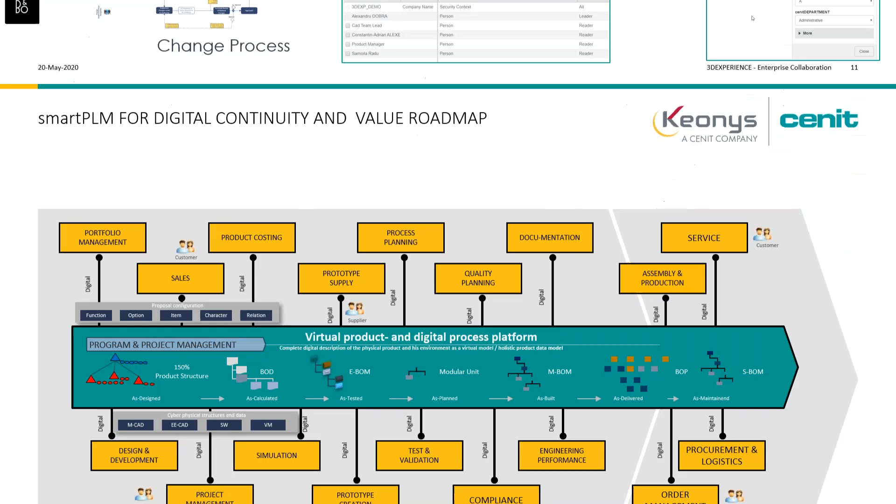Speaking about the digital continuity, we started in the earlier sessions with the platform foundation, managing documents, workflow activity, CAD data, and project program management. Also in deployment, there will be the first steps we deal with. The other building blocks will then continue to requirement management, BOM management, and the process continues to different topics like system engineering, variant management, ERP integrations, and every next grow phase will assign other departments, other parts of the process to get a full process continuity.

And within this total process, we, as said, will have also an important piece of change management, because it's not just a functionality, it's a cross-functionality over multiple businesses, and definitely, depending on your company, over multiple domains. So therefore, it's actually one of the important blocks to be applied within the context of product development.

If we focus on change management, we see that it interacts with all different aspects of the development process. That already starts on the design side with requirement management, and if we continue to a more system engineering approach, also with the definition of functional and logical definitions, from which you finally roll up to the physical definition, being your CAD data structure or your documents.

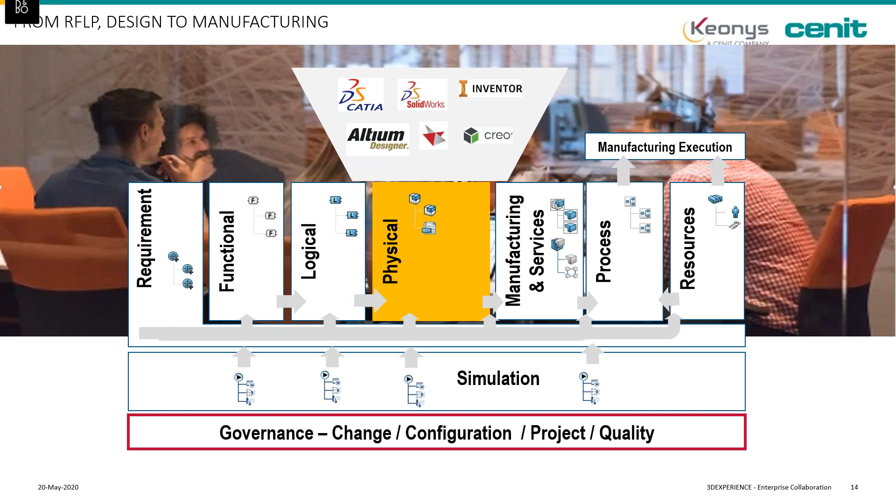So it's about a unified process - we speak of one environment, which is a unified environment, and you have access to all data. Well, as said before, we have the development structure. That's actually the point where engineering departments do their work.

Upfront, to come to the design, you interact with either engineering or the different departments coming with the product requirements, having your descriptions, actually building your system engineering approach, resulting in the build of your design. So that's the product development piece, governed with change management for the change process.

But going up, if your company also has manufacturing capabilities, you will not stop at development, but you also create your production structures, your work plans and instructions, also governed with change management. That will be the same changes, the same process, and a change upfront on the requirements will then easily lead up to modifications of your instructions.

What we then have is that we have different process scenarios for change management. So I'll go a bit more in depth now on change management.

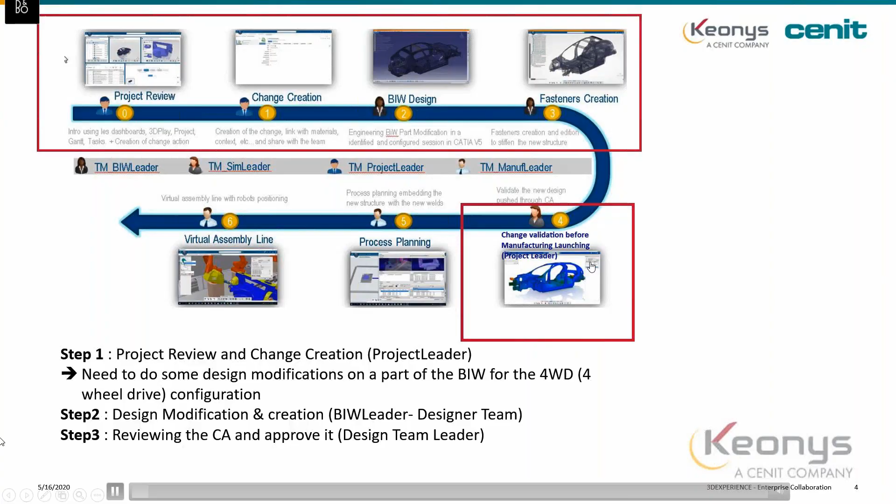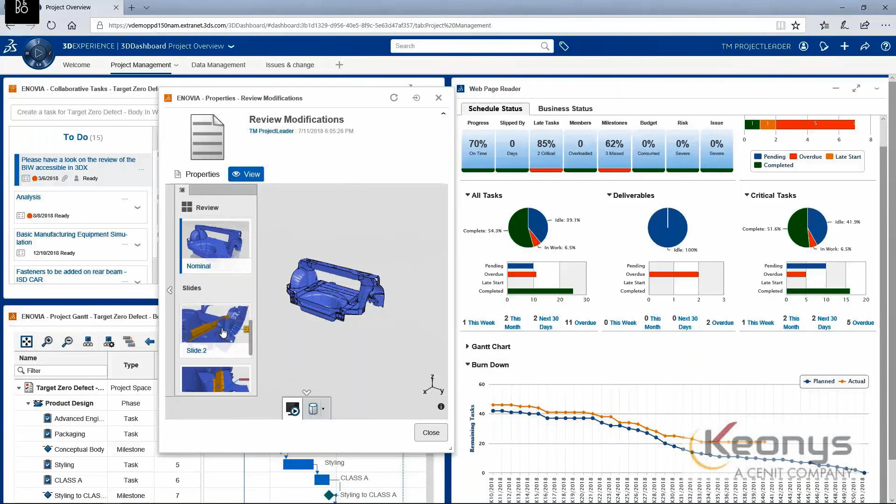I log in as the project leader and get my dashboard with a list of tasks, and I have one assigned to me which I'll review to see what I need to do. I need to make some modifications, and I'll have the direct view of what is in the review. I quickly see which part it is about or which environment, and on the different slides I see that there's a beam to be modified.

This is a web-based activity, so I can run it from every device, even mobile devices. So I read the description, and from this I know I have to pick it up. So from to-do, I move to in progress, notifying the initiator that I'm working on it.

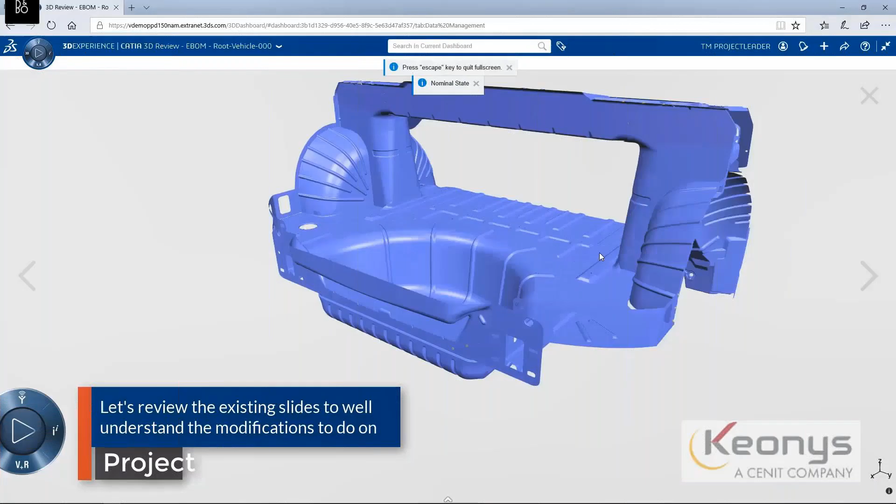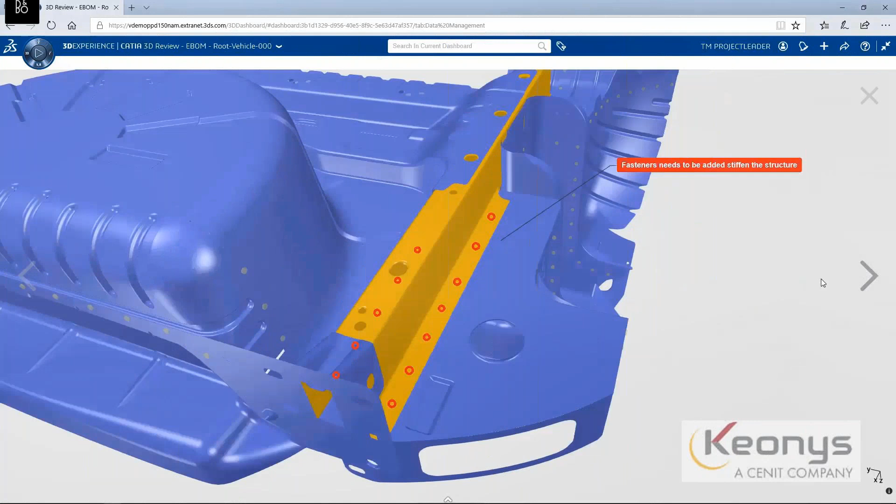To go into a bit more detail, I switch to an overview where I go to a full screen slideshow and see again the review. I have to perform some activities: thicken a part, do something with the fasteners, and here I see which part is impacted to do the modification. This is a web-based review activity performed by someone else and assigned via a task to me to be performed. And this structure should become a bit thicker.

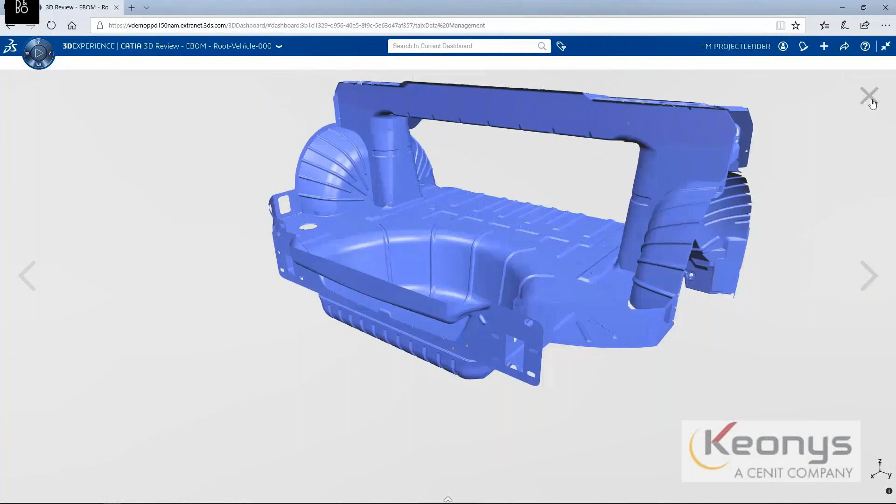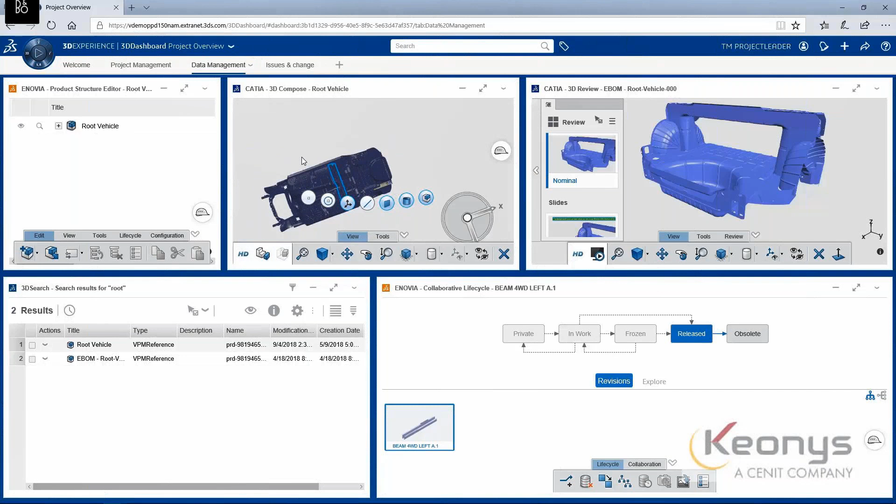So from here, I just have an additional overview where in the total car construction my part is to be modified. So I have a contextual review, and this web-based. What I'll then do is I'll create a change action because I want to assign to the designer the change to perform the modification.

I create, of course, a title and description for reference. And I will complete the change action with the definition of its severity and when it should be finished.

After creating the task, I will assign different people to it. It's a simplified process, so I will only have the initiator being me, an assignee, and who will validate. I assign additional members who should participate in this change. And from the existing members, I change myself as well, not as owner, but also as the reviewer role.

I will attach the documents for the proposed changes. So it will be my beam product.

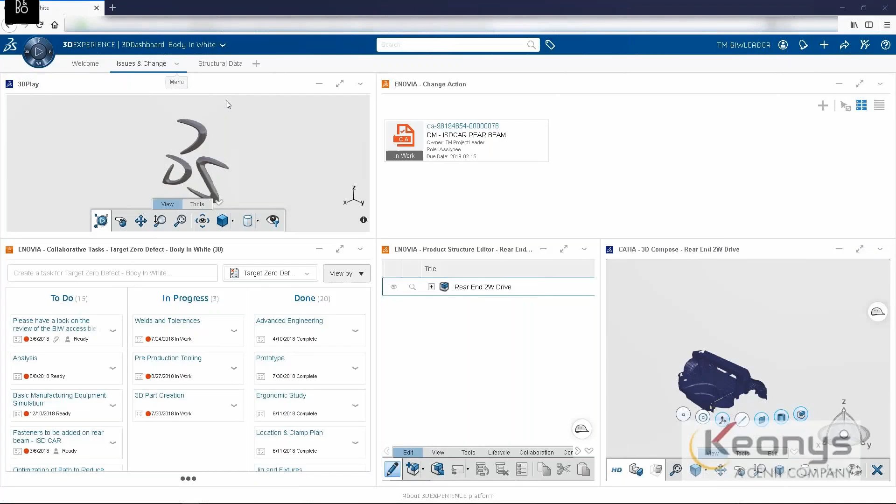I log into the system as Body in White leader, where I see my assigned change actions, and I can explore the request, and that directly in the browser.

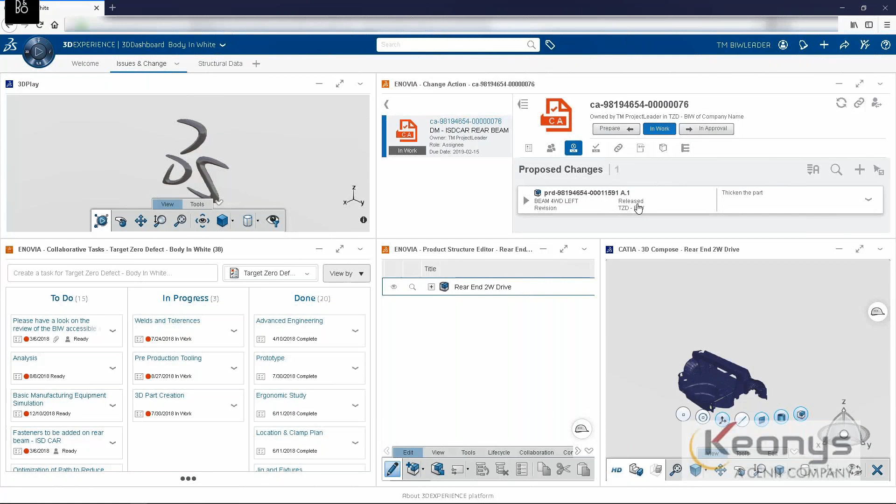So I don't need to open my CATIA environment to see what I need to be doing. I have the proposed changes, the released one, and I can drag and drop that in a product structure editor, a web-based widget, to see already what is the part about that I have to work on.

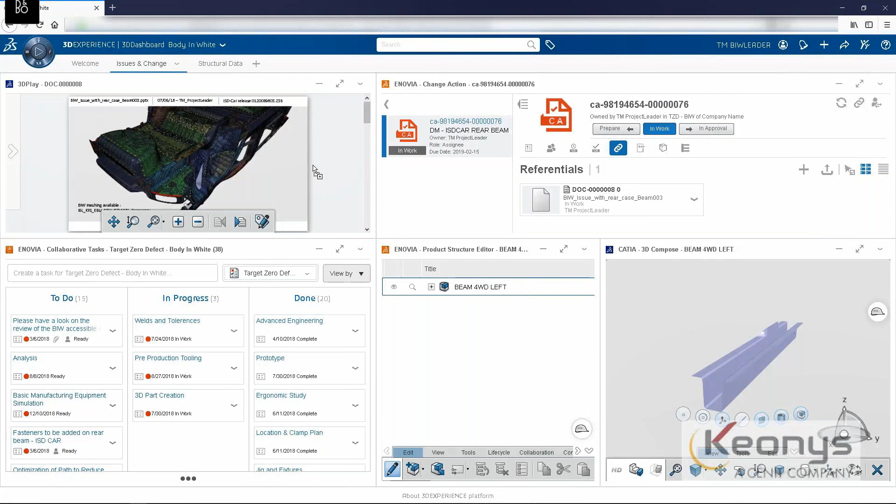From the referentials, I see the document with the information why a change would be needed. I have the different sheets of the document and see what I have to do. So this is an external provided document uploaded into the system.

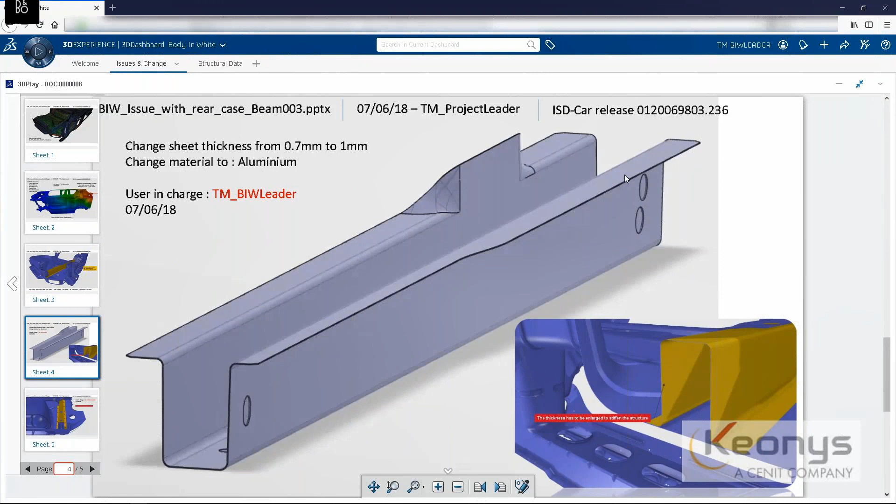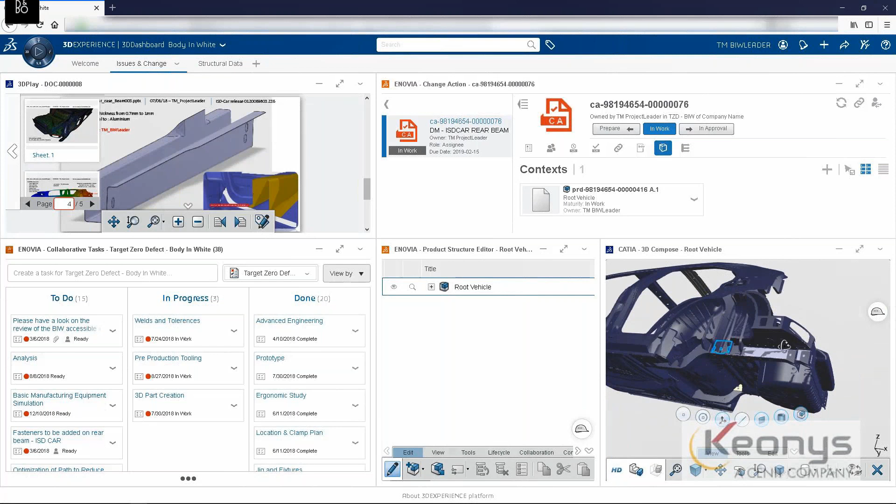And from the context, I'll look, okay, where is my beam located? I have the total car loaded in the viewer, and either graphically or via the product structure. On the left, I have an overview of where my part will be.

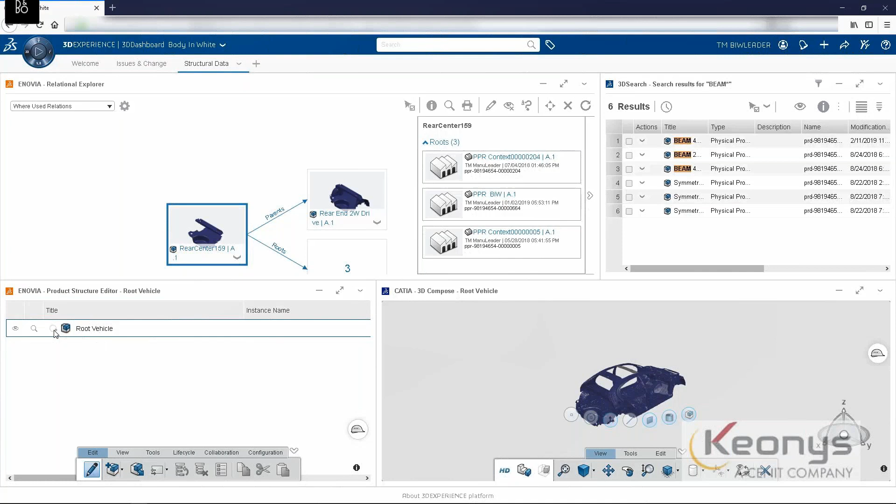Again, I go to the root vehicle. I knew that I had to deal with that one. Open it in the product structure editor. But on this tab, I have some additional widgets available to show relations. So I'll start building my context for when I have to do the design.

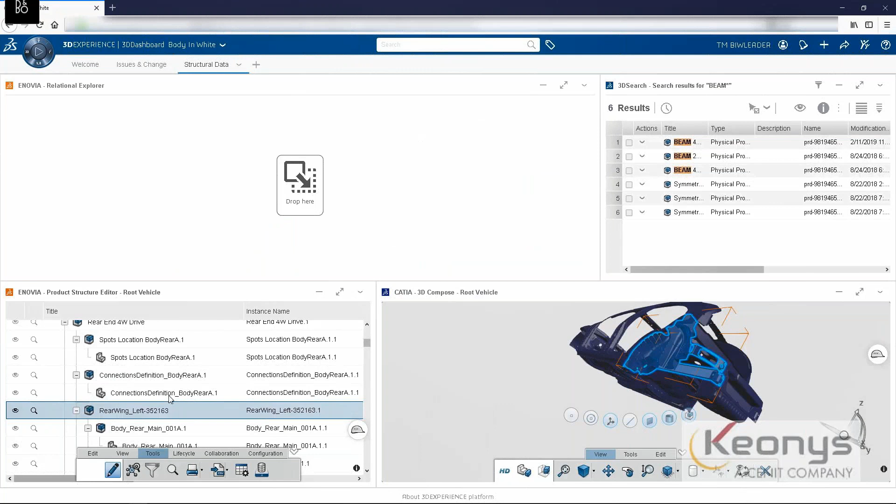I select, I can filter and go to a higher location, and also select in the tree what I want to review. Putting that assembly in the Relational Explorer, I have the ability to see which parts are related to the assembly, the parents of it, but also, and that would be good in this case, the root definitions. I see that there are manufacturing definitions related to this part. So I need to update or inform at least manufacturing department.

The change action was already created, so I'll select my assembly and I say change perform under the change action. And from that moment, I see the yellow flag, the cap at the bottom, I launch CATIA V6 opening with the data I just selected. And I do have my filtered design environment.

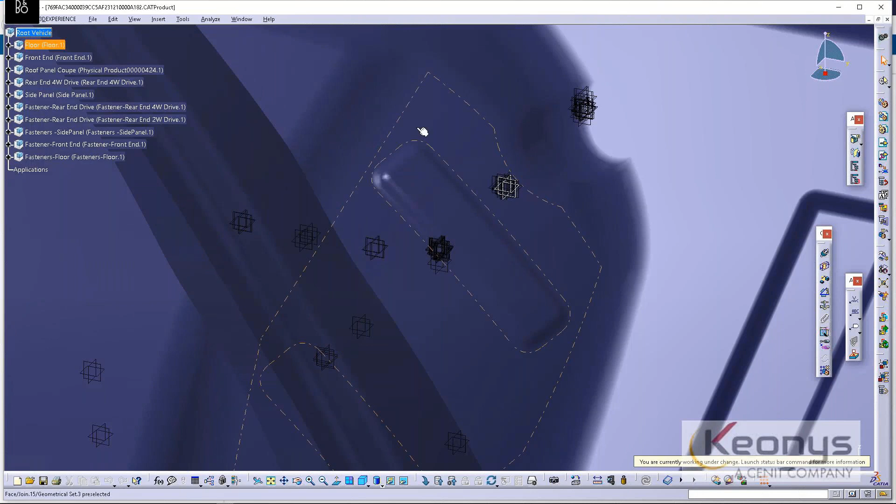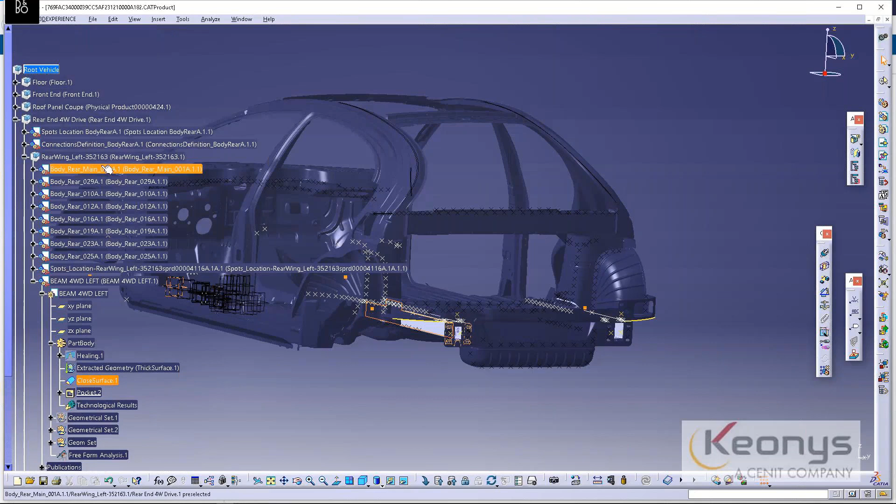I go to the bar. I'll have it opened, and this is as seen before CATIA V5 design, but in a context of 3D Experience CATIA as well. If you see the different icons, but I still perform the total modifications as it is V5 data in CATIA V5. I change the offset from, as requested, 0.7 mm to 1 mm.

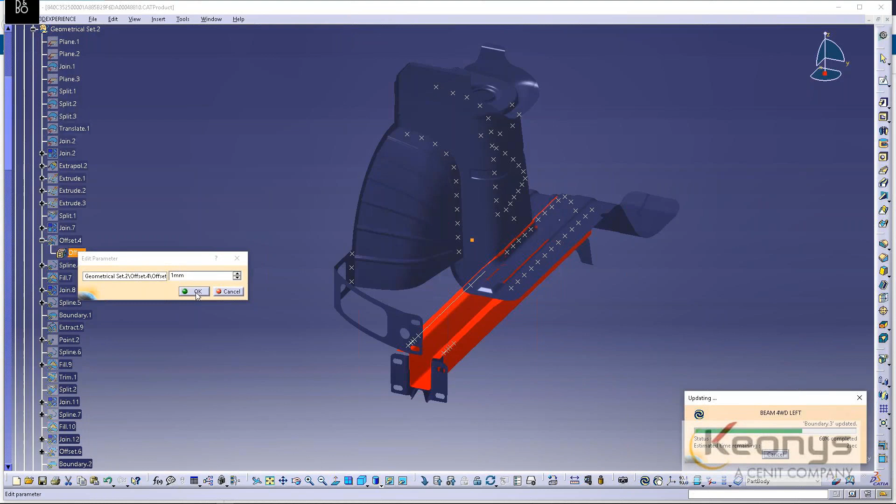I make the update of the part, and I do the save. And what is important with the save is I'm not exporting the data. I'm just saving directly back to the 3D Experience platform. And what you see is with the yellow cap again, that my save is performed under the change action. So the new saved data is known in the change action.

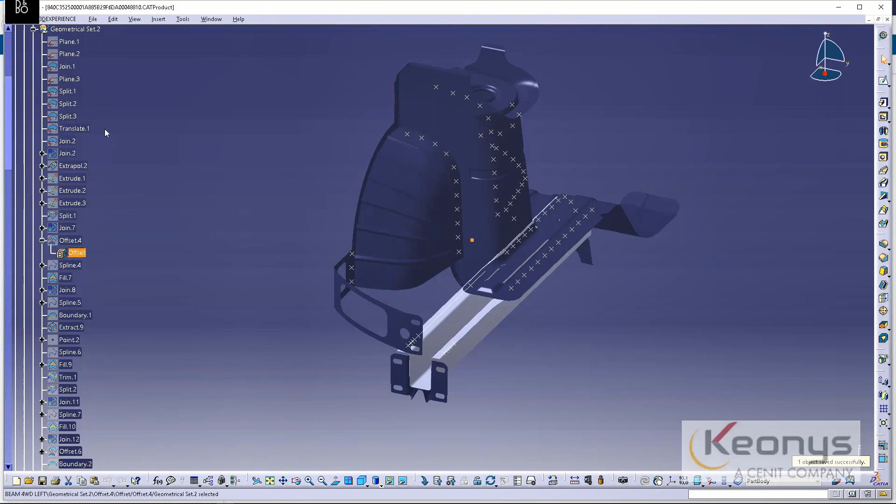I also added some new parts I did not show in the demonstration, but I also take them into account with the change. As I saw that this could be an impact, I also create, and that's optional, a task for a simulation team leader to notify him that I'm done with my design, so that he could validate the thickness change and perform the simulation.

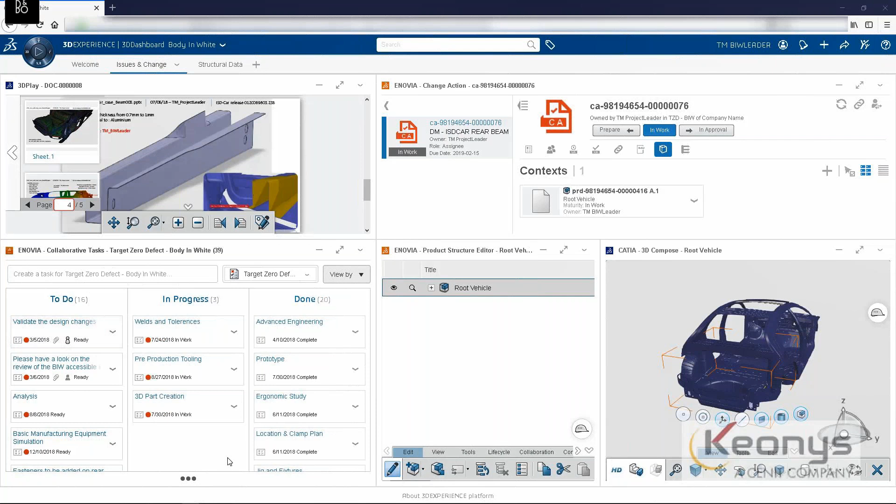So if this one is done, the assignee, and I'll provide the change request as a reference for him, so also the simulation engineer can work under the same change action.

I'll go back to the project leader. I connect, and based on the workflow, I now got a task change approval. It was in the change action already, so I have to do the changes. I'll accept it, and I can review if all deliverables have been performed.

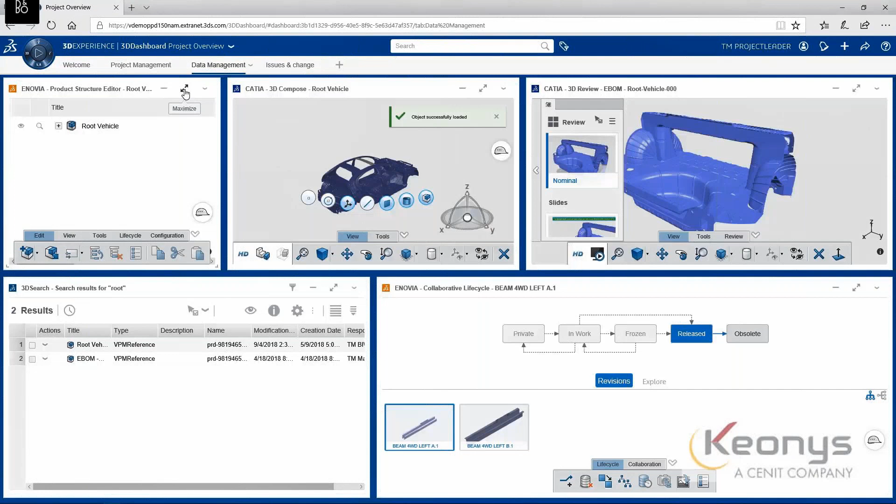So actually deliverables being provided and changes being done. And under the realized changes, I now see what has been modified. So there's a maturity change, a revision change in it, and parts have been added. So all changes are visible, not only the initial one, but also all other actions performed.

I can have a check in the product structure editor, so it gives me the ability, even not having CATIA, to see what has been done.

And I need to freeze the parts, and I'll perform under the change action the freeze activity, so a life cycle change from in work to frozen. This could have been an action from the designer, but in this scenario he leaves it to the project leader to make this judgment.

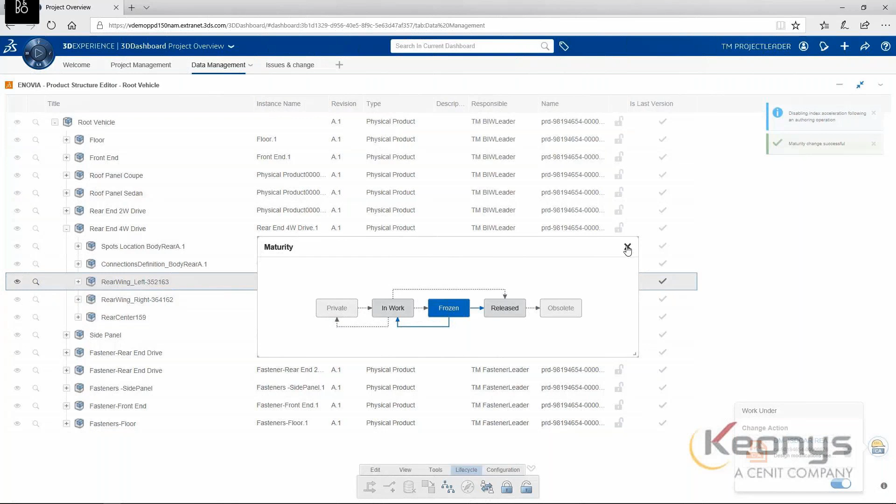Now when the design is frozen, we can put the CA in approval, and the next stage will then be I have to approve, thumbs up, add some comments, and done. It will skip the approved state immediately to closed, completed, and the maturity of the CAD data went to released. I've got a completed CA, and I can also switch the task to do the change to done.

And as a project leader, I also now know that there was manufacturing impact, so we'll create an additional task for manufacturing to have a look at it.

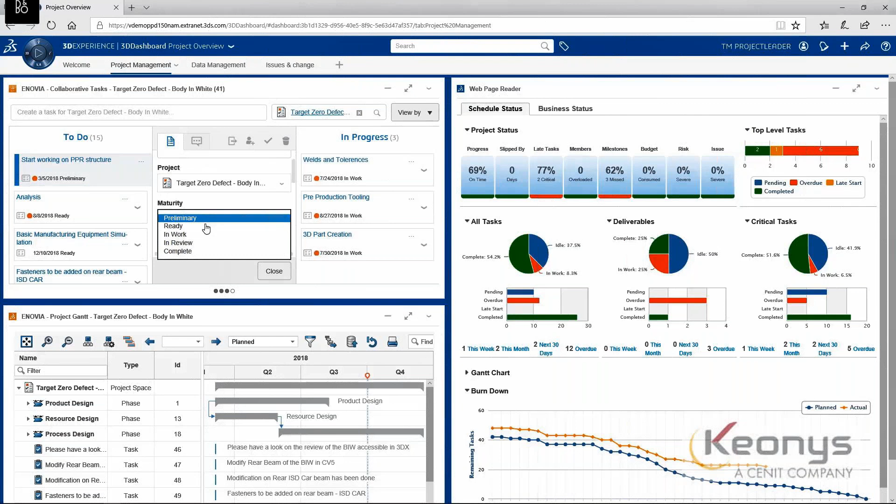If I would have governed this over a change order in the beginning, I would have known this and could have assigned all additional parties already upfront, having different change actions and having it governed by a change order. So those are the options you have depending on your company needs.